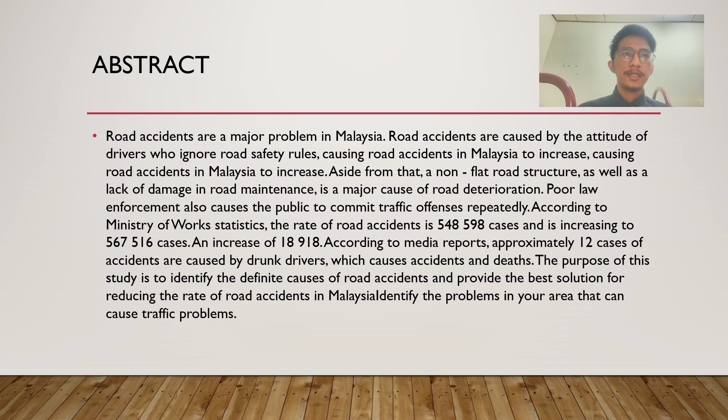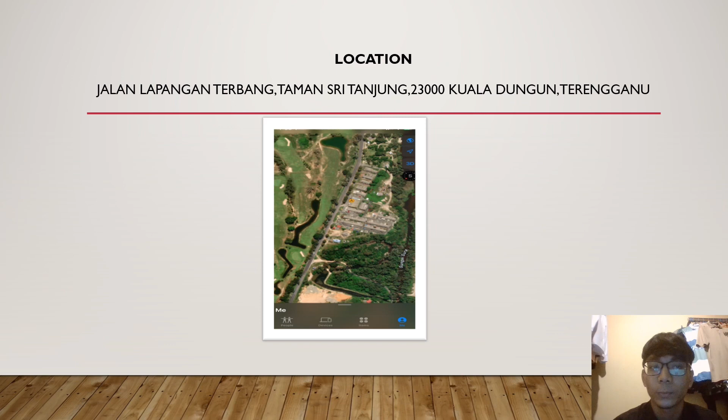Problems. First, poor road condition. Poor road condition can certainly cause accidents. Some of these accidents are weather-related, such as heavy rains, tornadoes, snow and ice. Drivers do need to check road conditions in advance if bad weather has been forecast and drive according to conditions.

Second, badly maintained roads can also cause accidents. Things like potholes, uneven surfaces, broken concrete, cracking of the road surface, and even sinkholes can damage vehicles and injure occupants. The worst accidents occur when the driver does not expect the road condition to be so dangerous. Hitting a large pothole or crack at speed can cause a serious road accident, losing control of the vehicle, veering off the side of the road, into oncoming traffic, or rollover.

Third, public road maintenance is the responsibility of a city, county, state or federal agency. Poor road condition may be due to deferred maintenance, budget cuts, the wrong use of material, and poor design.

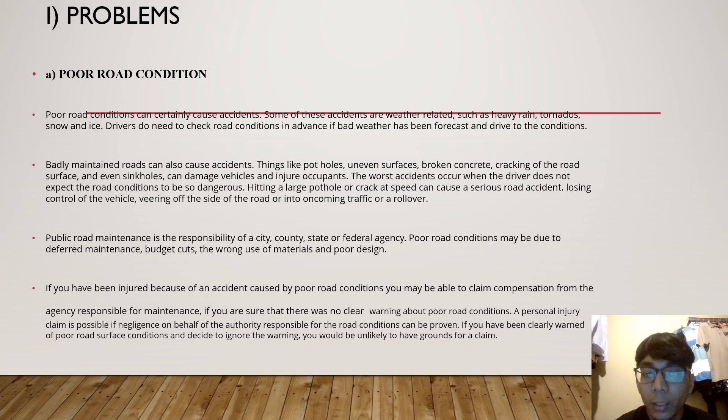Firstly, I want to present about traffic jams. In many cases, multiple factors can occur at once. One cause of traffic congestion can lead to another, such as when the onset of challenging weather for road travel generates a rise in traffic as drivers rush home. Traffic creates more problems than just commuting delays.

Traffic congestion can cause compounding issues for delivery drivers and the supply chain, slowing the restocking of food and other essentials to communities that do not have many local sources. High congestion can also influence the public's perception of a community. It may discourage new business and potential residents from moving to the area for fear of constant traffic.

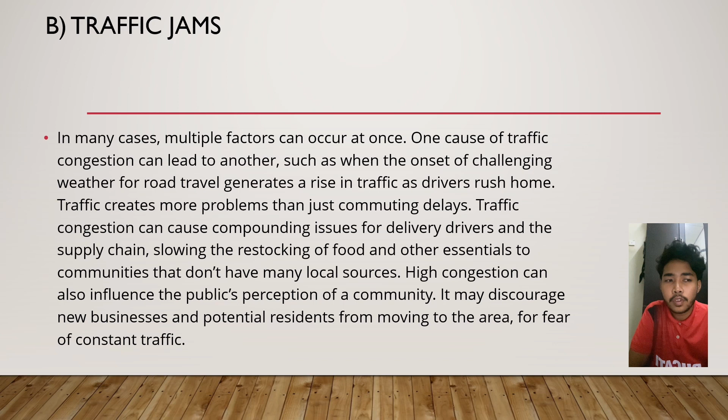The temperature factor also influences it since friction creates heat on the road surface. When the friction of the automobile is combined with the warmth of the road, it will expand and ultimately generate a few cracks, which, if not corrected, will progress into more pronounced potholes.

Weather is another aspect that impacts this. Malaysia has an equatorial climate, which means the weather may become humid and hot at times. In 2017, the average rainfall in Malaysia was 2,000 mm to 2,500 mm, with temperatures ranging from 25 to 31 degrees Celsius. When the duration of rain dispersion is so long, it will erode the road surface.

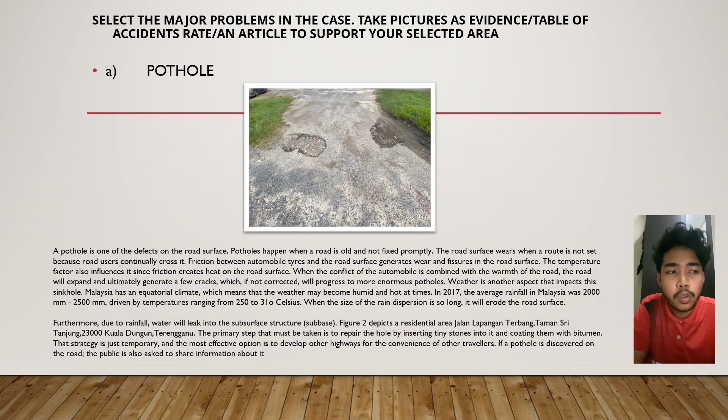Next, about road rutting. When perceived with the naked eye, rutting is a road condition. Furthermore, rutting is a sort of indentation generated by shearing pavement that happens along the rut. A rut is a long line fracture created by the repetitive movement of wheels of a vehicle.

The road should be studied to establish the reason for the breakdown: insufficient compaction, subgrade rutting, poor mix design, or scattered tire wear. Small rut depths of 1/3 inch are often untreatable. Pavement with deeper cuts should be smoothed and covered.

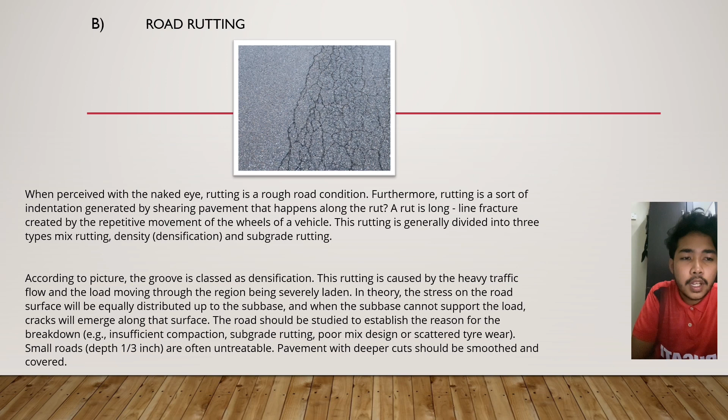Determine steps of solution to these major problems. A. Pothole solution. First, for the most efficient method of pothole repair, go for full depth roadway pothole replacement. While it's a complicated method, repairing potholes this way is highly effective. Second, however, this task is best left to a professional who knows what they are doing. It uses old asphalt to rebuild worn out

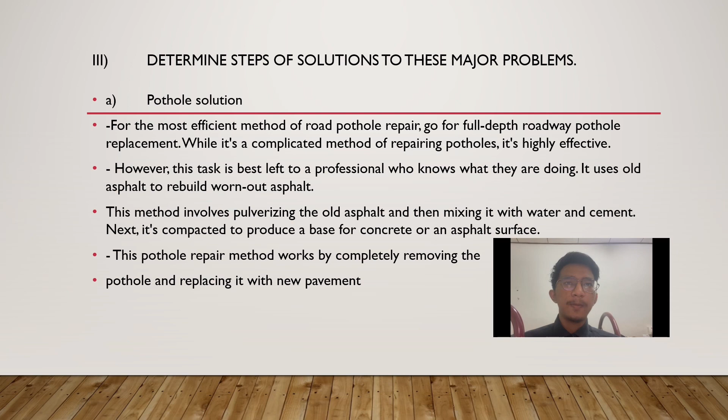asphalt. Thirdly, this method involves pulverizing the old asphalt and then mixing it with water and cement. Next, it's compacted to produce a base for concrete or an asphalt surface. Next, this pothole repair method works by completely removing the pothole and, lastly, replacing it with new pavement.

B. Road rutting solution. There are several ways to prevent rutting on roads. One method involves improving the structural layer thickness or reducing the stresses on the surface. The other method involves increasing the thickness of the subgrade.

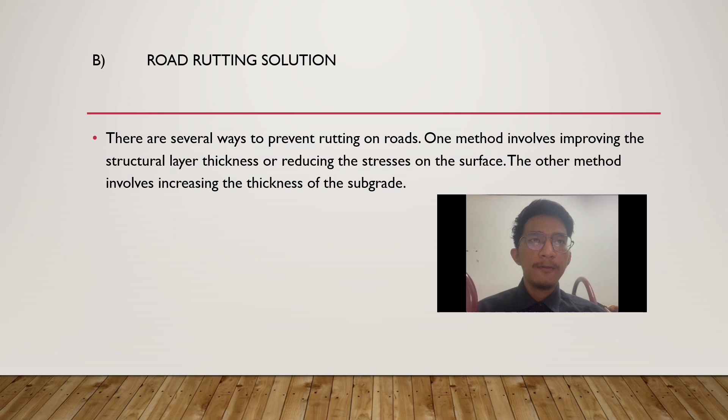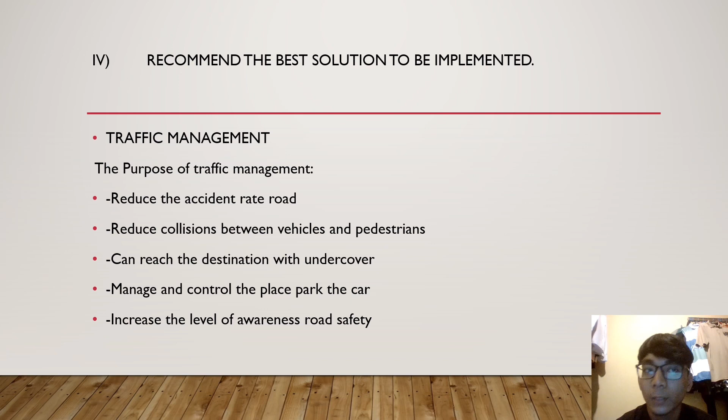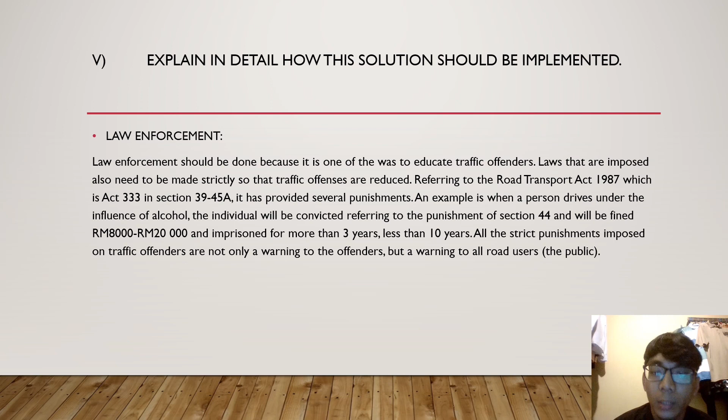An example is when a person drives under the influence of alcohol, the individual will be convicted referring to the punishment of Section 44 and will be fined Ringgit Malaysia 8,000 to 20,000 and imprisoned for more than 3 years, less than 10 years. All the strict punishments imposed on traffic offenders are not only a warning to the offender but a warning to all road users, the public.

Sensitivity to the environment while driving. Drivers are expected to always be aware of the environment and in good condition when driving. This should be taken seriously so that other road users can use the road more comfortably. Among the examples that should not be imitated is chatting while driving, whether face-to-face or using a mobile phone. This can result in a driver not being aware of their journey and will subsequently result in loss of control while driving due to the driver's own negligence.

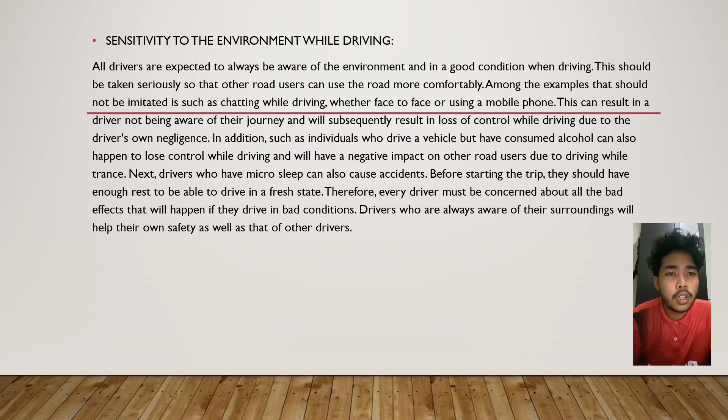In addition, individuals who drive a vehicle but have consumed alcohol can also lose control while driving and will have a negative impact on other road users due to driving while drunk. Next, drivers who have micro-sleep can also cause accidents. Before starting the trip, they should have enough rest to be able to drive in a fresh state.

Installation of traffic and road signs and warnings. Every intersection and warning sign on every road is very important because road users will depend on the instructions and warnings on the signs. In addition, the authorities must be sensitive to signs that are damaged, blurred, out of date and so on so that road users are sensitive to the road.